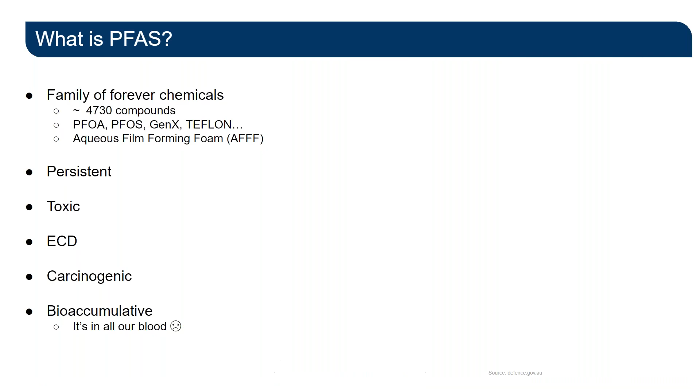Quickly on PFAS. For those who are not familiar with this compound, there are close to 5,000, or depending on who you ask, maybe even 6,000 of these compounds that have been in use since the 1950s. Folks have been using this for various applications, mostly for industrial application, but also in consumer products. For example, it's in the most popular ones I would imagine, something like Teflon. So everyone's got a pan at home that has Teflon coating, which makes it non-stick. This is a very popular polymer application of PFAS compounds.

But then there are many others that we don't even know exist. For example, dental floss is covered with PFAS as well. The use of this compound is almost endless. It's in everything that is either rainproof, non-stick, or non-scratch, any of those things, but also in other applications like firefighting, because this is resistant to heat and such.

Now, why are we talking about a compound that we have had since the 1950s or so? It's because as we learn more about these compounds, we are finding out that they could potentially be carcinogenic. These compounds were built to be a forever chemical, in other words, built to resist physical or chemical changes. So chemically, they're some of the strongest bonds that you'll find.

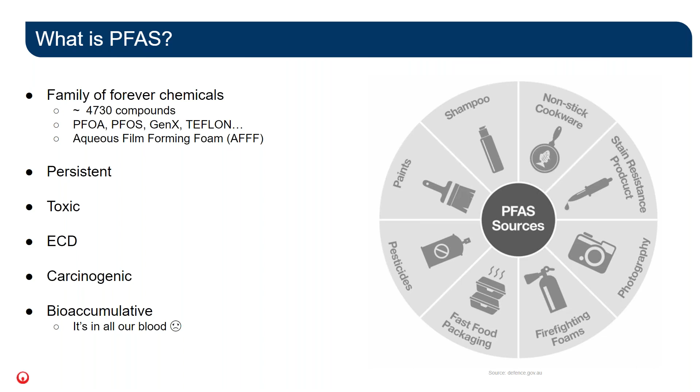There are some studies out there that say some of these compounds could have a half-life within your body up to 12 years. That's from when you stopped using it. So it's a pretty tricky compound.

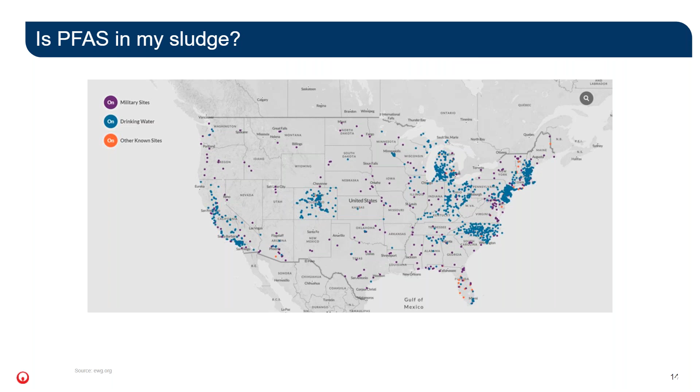That's what it means. In short, there is PFAS in almost every part of the world where we have industrialized, where we are using things like Teflon or even fast food. So it's everywhere. So it is in your sludge.

They tend to be hydrophilic, so they like the liquid part of the wastewater. The terminal compounds, which are fully formed, don't like liquid, so they're hydrophobic. They like to stick to things, so they end up in solids.

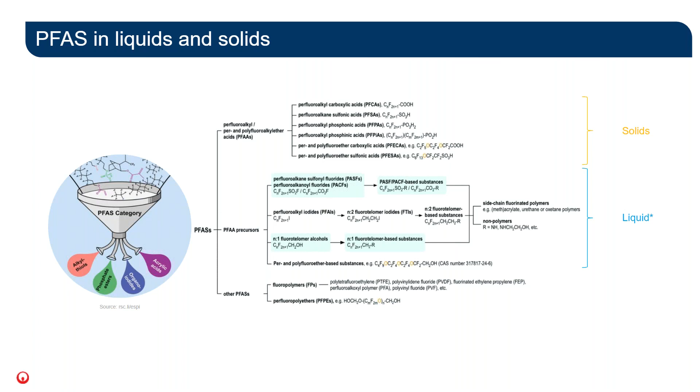Because we are going to be talking about PFAS in sludge, what we will be dealing with is mostly those terminal compounds. Now, what's the difference between each of them? It really only means that a terminal compound is far easier to identify or quantify in laboratories, because that's what the analytical capabilities are right now.

So if you have to figure out all of the precursors in the matrix of thousands of PFAS that's out there, you need to do what's called the total oxidizable precursor, or TOP assay, which basically oxidizes the precursors into terminal compounds and then quantifies them. But you can't really break them down into individual compounds like PFNA or PFOS, simply because that's not the nature of the TOP assay.

So in the next 5 years, GWI estimates that the utilities in the US alone, this is not Canada or Mexico or anything, it's just the US, they're going to spend $4 billion to address PFAS.

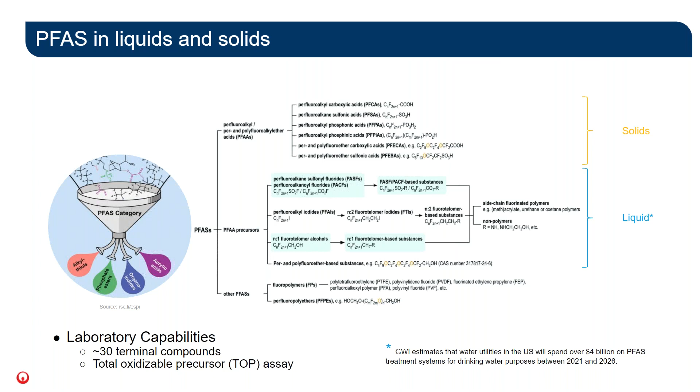In general, if you're concerned about this being in your drinking water, the best thing to do would be for you to just pick up the phone and call your local drinking water plant and ask them for the data. As a ratepayer, you should be able to get that information. And I surely did for my town here.

So that brings us to the next question: how do you destroy this PFAS? This is built to be indestructible. This is a forever chemical. You can cook on it, so obviously it's got some thermal resistance. So how do you break it down?

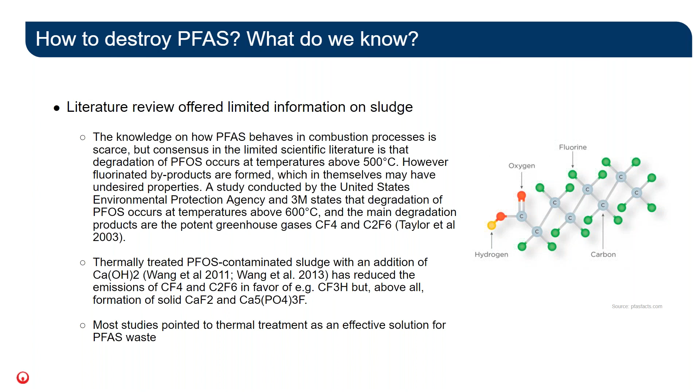We are not the first ones to ask this question, obviously, because you can see here there's a couple of papers from 2003 or earlier where others have attempted to do the exact same thing. In one study, EPA and 3M were taking pure PFAS, PFOS, and combusting it at some degrees, in this case 600 degrees or so, and they were basically seeing if there's any degradation, and if so, does it form any other gases and such.

There were other studies. We didn't cite all of them here, but there are other studies that looked at potentially pre-treating the waste with some known stabilizing chemical, lime or whatever the case might be, to see if they can further reduce greenhouse gas and such.

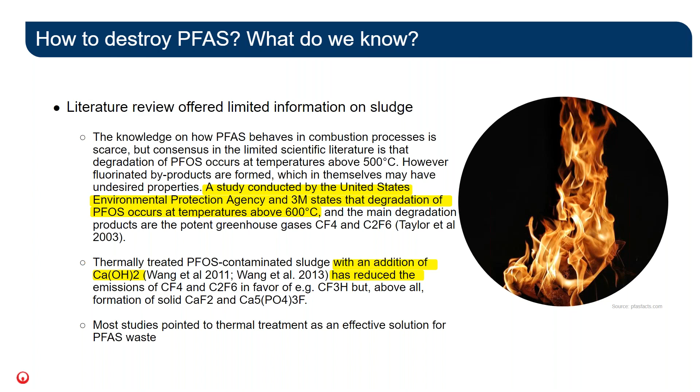So we took these studies as a basis for our work, because rather than just starting from scratch and shooting in the dark, we thought we'll just look at what others have done, see what we can take from that, and improve on those studies and apply that to the wastewater industry where we're dealing with sludge, which tends to be a little more complex because we are not burning pure PFAS compounds. It's in a sludge matrix, so there are other things you need to deal with, just more than having to worry about the PFAS destruction itself.

So with that, we looked at the thermal processes as an option. We also did look at chemical treatment, but that's something we are not pursuing at this time. We do have some options for chemically treating, oxidizing sludge, but we just don't think it's going to be a feasible solution for a marketplace, which usually tends to select technologies that are affordable.

We are going to focus mostly on thermal reduction, but I have included indirect thermal drying in our study because we wanted to have drying as the first step before we do some thermal reduction, since we have found that incineration of just wet cake is not necessarily the best way to go about it.

So with that being said, under the thermal reduction category, we looked at incineration. We also looked at supercritical water oxidation, and we looked at a couple of emerging technologies, or stuff that's out in the marketplace that are entering the thermal reduction marketplace, like gasification and pyrolysis.

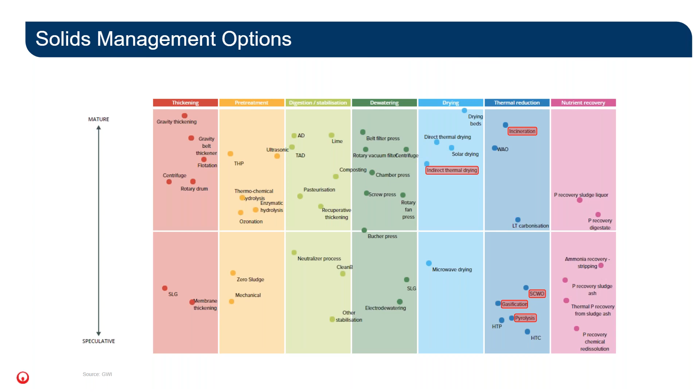We happen to get lucky because we are pretty close to Duke University in the Triangle. They have a supercritical water oxidation plant, a small plant, 1 MGD plant at the university, which they could take sludge and run experiments and such. So that's just an option that we got lucky for, being geographically in a place where we had some access to it.

You'll also notice some of these technologies require pre-drying. So for example, for an incinerator and the supercritical water oxidation, they could just take dewatered cake, say 25% or so, and they're able to treat that. Whereas pyrolysis, gasification, as well as the Biocon ERS, you need to pre-dry the sludge so as to get rid of all the water. That's where it performs best.

And again, the challenge with having just dewatered cake in an incinerator is more than just the implication on PFAS destruction. It has to do with the volume of flue gas that you're going to generate, because it's going to have all this water and steam that gets carried out of the system, making the process complex, because we are going after some compounds that are basically at detection limit in most instances. So you don't want to compound the problem by having excess flue gas as well.

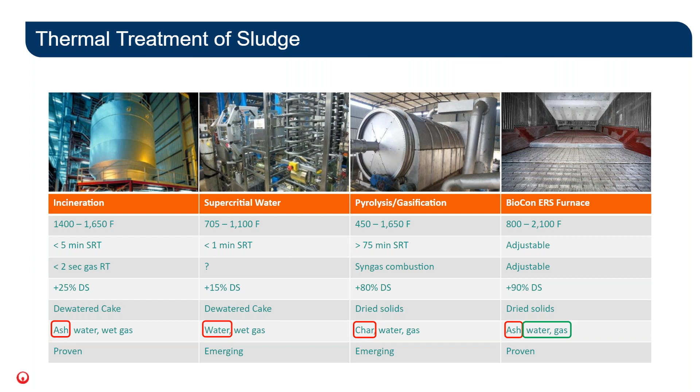Those are critical, because if it were up to me, I would leave the sludge with PFAS as is, rather than burning it and taking the PFAS and now putting it out in the emission. You're better off to not do anything if you're doing a shoddy job when dealing with an incinerator. That's our philosophy, so we really wanted to study in depth to see what the implications are.

Just to give a quick overview for those not familiar with the Biocon ERS: it's basically a dryer in combination with a furnace. So we take sludge, dry it with the dryer, and we get it up to Class A biosolids. Theoretically, you could stop there and people can use the biosolids as a biofertilizer. But in our case, we are going after PFAS, so we are going to combust it at high temperature in an ERS.

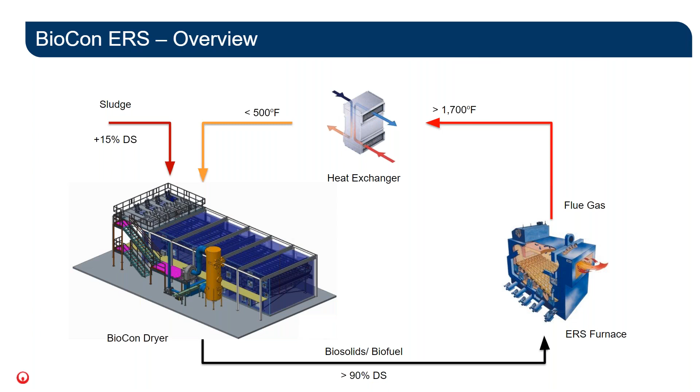The flue gas is then captured in a sequence of heat exchangers and an economizer and such, and you're reusing the heat coming off the flue gas to power the dryer. So once you have the system going, once you have both the dryer and the ERS functioning, you don't need any more fossil fuel to get the system to run.

It's self-sustaining energy-wise. It doesn't matter if it's digested sludge or undigested sludge or whatever the case is, because we are drying it up to more than 90% dry solids. The sludge autogenously combusts within the furnace, so there is no need for fossil fuel. So this is a very sustainable process.

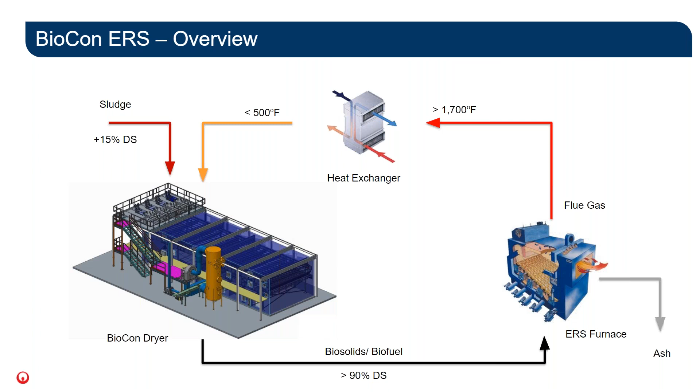And in the past, we just used it for energy recovery. That's where the name ERS comes from - it's Energy Recovery System. It's really not anything fancy, it's just an energy recovery system that we have now optimized for PFAS destruction. Again, just to quickly touch on what it is, it's a step-grate biomass furnace.

So it's not a new technology by any means. It's very common in colder climates, in countries like Canada, or if you go to Scandinavia, like Denmark, Finland, and Sweden. There they have so much wood chips and sawdust from the timber industry that they use as the primary fuel. Even though they have tons of natural gas and fossil fuel, they just take the leftovers from their timber industry and use that as fuel.

So you could actually go visit wastewater plants in Scandinavia, and they may even be producing steam using these types of furnaces. I've actually been to a thermal hydrolysis facility up in the middle of nowhere, Sweden, and they were using this exact system to take wood pellets, burn them, and produce steam for use in the thermal hydrolysis process. It's a pretty cool technology.

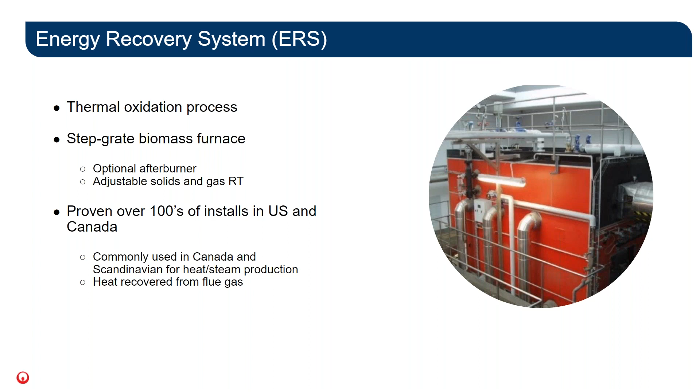Again, nothing new. It's just something that we like because it has features where we can adjust how long the solids and the gases need to be within the system. That gives you the flexibility to control and optimize the process for breaking down those complex PFAS compounds.

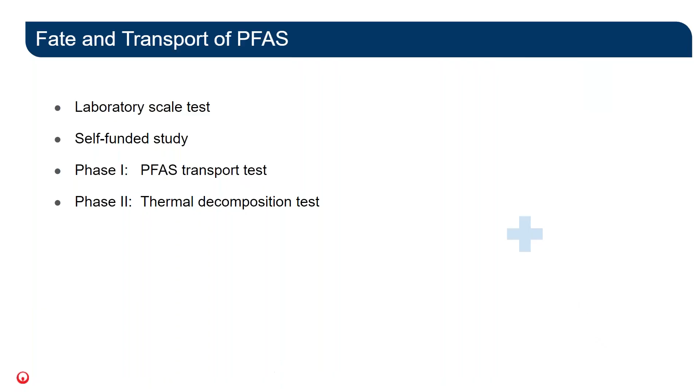The research, again, we focused on taking what we know and applying that on a laboratory scale. The reason we wanted to do it at laboratory scale is twofold. One, none of the full-scale plants wanted us to go and throw PFAS into their sludge, whether they had it or not - and they did - but they didn't want to do that because there's too much risk, since you're emitting directly to the atmosphere when it's all said and done, and they didn't want to take a chance contaminating the air currently being emitted.

And two, there was always this lingering question as to, if you did it in a full-scale study, what happens if PFAS does come out of the sludge, and what if it ends up sticking to the walls and ducts within the ERS or in the duct lines going into the air pollution control system? You may still not measure anything in your emission, but that does not mean you have successfully destroyed PFAS. You just converted it into something else that's now stuck to the walls, and maybe 10 years from now it'll break through, and next thing you know you are contaminating the air around the facility.

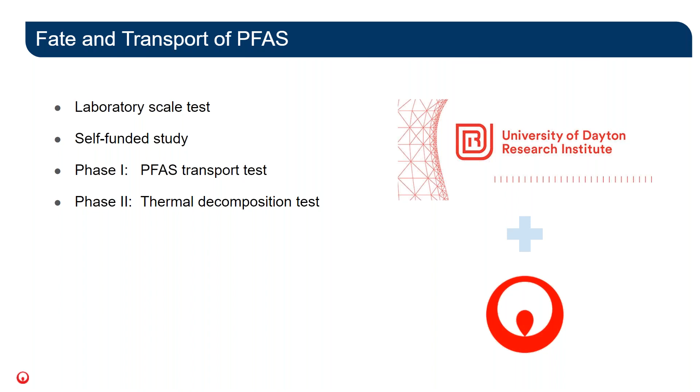So we decided we wanted to do this in a controlled environment such that we can actually clean or wash the insides of the reactor, so that we can capture anything that could potentially stick to the wall. We did the study in a couple of phases, and we self-funded it because our intention was to commercialize this solution.

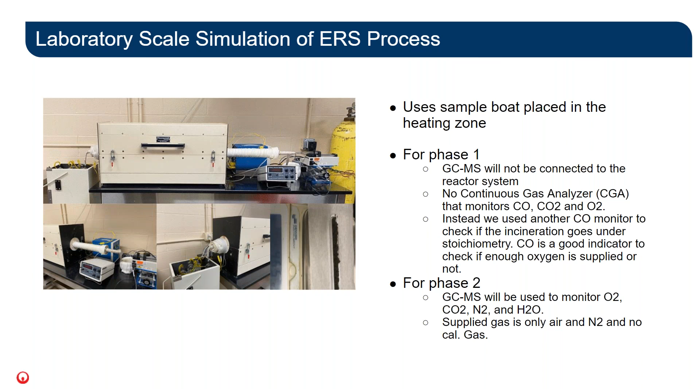Here's a quick setup. It looks kind of boring because it just looks like a big box with something sticking to it, but if you look at the schematic, there's a quartz furnace that we can control the temperature of. And we have the option to add excess air, nitrogen, or any other type of fluid to the system.

Then we could introduce the sludge either in a batch format or in a continuous format. We also had options to wash the system fully, so that even if any PFAS hits the wall and stays there, we can clean that out and capture everything in impingers. So we are able to do analysis on both the liquids and the solids.

This was a perfect setup for us, and we collaborated with the University of Dayton. They are contract researchers, and we hired them to do the work for us. One reason we chose that particular university is because all the past studies, the 2003 study and the 2013 study, pointed us to this research institute, since they were the same folks running studies for EPA as well as 3M. We thought these guys already know what they're doing, so they must have prior knowledge to help us with the setup, so that we're not reinventing the wheel.

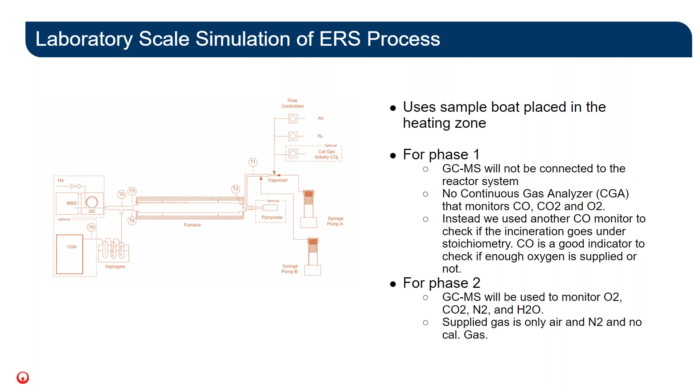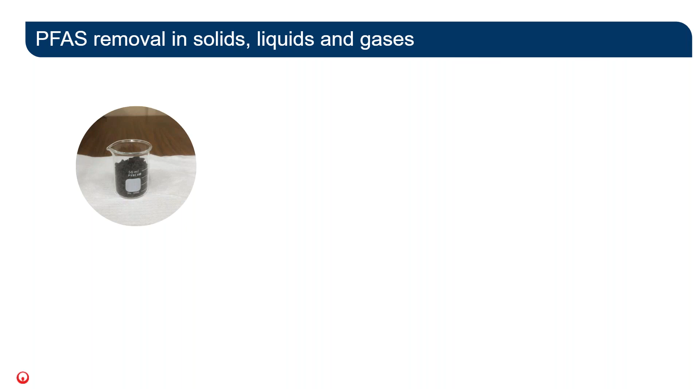Typically what we would do is take sludge, dry it up to 90 plus percent. We have our own methodology for doing that in our lab here in the Raleigh Triangle area, and then we send it to those folks. They then place it in a sample boat, like in the second picture, and insert it into the furnace.

In this case, we removed all the insulation just to take photos, but that's not how it is in the real world. On the other side, we also removed the insulation just to see if there's any soot formation. You know you're not getting treatment if that photo doesn't look clear through the quartz tube, and if you see black smoke or anything else, it's not working.

What we noticed was if we have low oxygen, like in a pyrolytic condition or a gasification type of level, we were having soot formation and other issues, which ended up with very low PFAS reduction. So in a way, we also learned that some technologies don't really work, or don't work as well.

The impinger that I'm showing here is one of those times when things didn't go well, and you can see it's fully covered in soot. That's because it's one of those failed scenarios where the oxygen concentration was not high enough. The final photo is basically of the inert material.

If you burn dry sludge like what we have, dried sludge at about 90%, you're going to end up with something like what you're seeing here. Although the volume looks similar, in terms of mass reduction, that's about 60% reduced mass. So typically about 40 to 50% of your dry sludge is inert material.

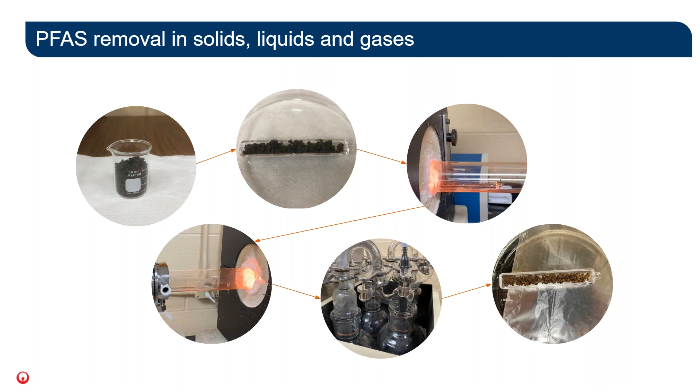We had quite a few challenges. I don't want to spend too much time here, in the interest of time I'll keep moving forward. But some of the challenges we had included just finding and identifying locations.

We knew the plants that had problems, but when we asked for sludge, even though we signed NDAs and such, they were pretty hesitant to participate because they were afraid that information would get out and people would know that they have issues.

But we did finally manage to get a couple of good locations and get sludge. We had to spike sometimes just to get a high enough concentration. We had other problems, which again, all of these challenges were overcome, but they're explained in our paper. We pre-published it in 2020, which is not a complete paper, but we're hoping to have it published in a journal sometime by the end of 2021. But again, multiple problems, but we managed to overcome almost all of them, with the exception of maybe the fluoride balance, which I'm not even sure is possible, and we may abandon that part of the study.

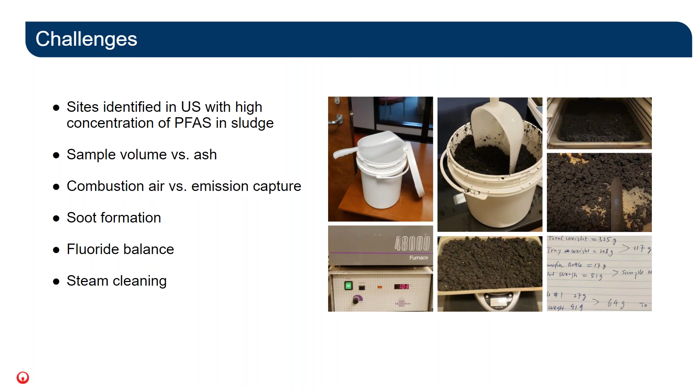Just a quick update on the progress. So in phase 1, we did about 5 or so transport efficiency studies, which gives you an idea of how accurate your data is going to be, if you're able to capture all of the PFAS that's going in, and if you do the mass balance, does it all come out, things of that nature. So we took our time to get that part figured out, and of course phase 2 is where the meat of the experiments are.

That's where we are studying low temperature combustion, high temperature combustion, and then various other conditions which mimic or simulate what happens in the ERS, and that way we get all of the efficiencies narrowed down. We're also continuing the study - it's still ongoing - to see if there are additional steps we could include to simulate air pollution control technologies like a scrubber or a mercury removal step, which we think is going to be necessary for this type of application.

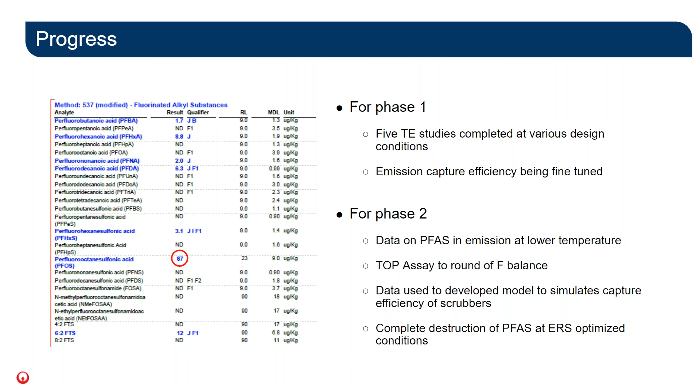With that, some quick early results. Here, we had to verify volatilization of PFAS, because there are studies out there that show you can volatilize PFAS under some temperature conditions. So because we use a pre-drying step, we wanted to make sure that none of those known compounds were coming out of the solid phase or the liquid phase into the gas phase.

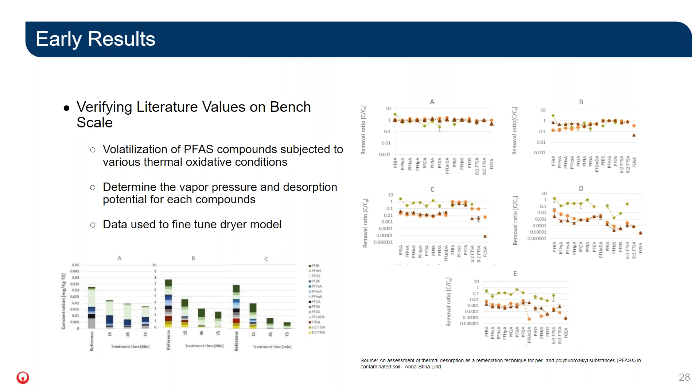So we had to do some of those verification studies, just to fine tune the dryer model. And then, of course, we did the calibration model - this is where all of the data that we ever got, we basically used. And of course, the first thing is we wanted to see at what temperature - the T99, or what they used to call in the old days, the incinerability index. It's a mouthful, so we just go with T99. Basically, that tells you at what temperature 99%, just a 2-log reduction or breakdown of the compound, is. But what we learned is some of the big compounds break easier, but they form smaller chain compounds, so we had to do multiple studies.

Our studies were mostly various conditions of temperature, oxygen concentration, chemical concentration - so the sludge with more PFAS or more of this particular compound, or less of them. And then we subject it to various conditions to basically get an idea of what happens in the time frame, within 4 or 5 minutes - that's basically what we're looking at, or 2 or 3 minutes, because it's a combination of what happens in the sludge phase as well as in the gas phase. We took an average and came up with this idea.

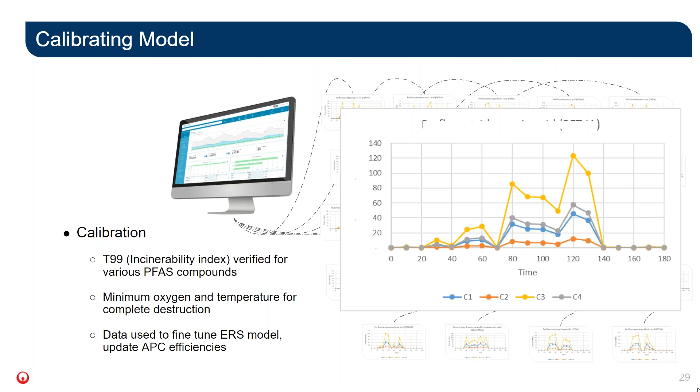So just to give a quick high level, the info on what we have since done is we have over 24 PFAS compounds that we have studied. Now, as analytical techniques improve, the labs probably are able to detect more terminal compounds. Right now, they can only do 24 - we use 24, but I heard just a week or so ago that they added 2 or 3 more compounds.

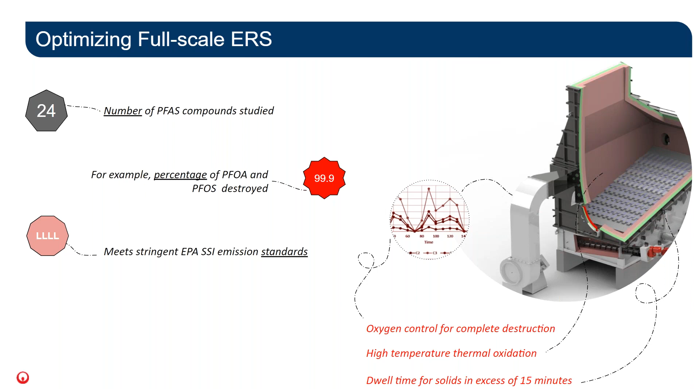So maybe that's something we may have to repeat. But if the compound is close enough and we know its properties, maybe we don't have to. Just to give an example, we had a couple of those compounds where we were easily able to get 99.9%, so 3 log reduction. But then there are some smaller or short-chain compounds which are much harder to get to. Our goal was to do all this and still meet the SSI standards required for combustion technologies. So with that, this is just a summary slide.

In our current model, we are able to optimize our ERS, so we can provide this as a fully industrialized solution, because this isn't the first time we'll be doing it, but it'll be catered towards PFAS. So we are able to do PFAS reduction and PFAS treatment using thermal oxidation based on the ERS model.

We also believe air pollution control is going to become key here, because these temperatures are much higher than what you typically see in conventional incinerators. But because we're dealing with PFAS reduction, we focus more on the ability to destroy PFAS as opposed to just being a low-cost solution. So air pollution control is still going to be a predominant cost in your solution.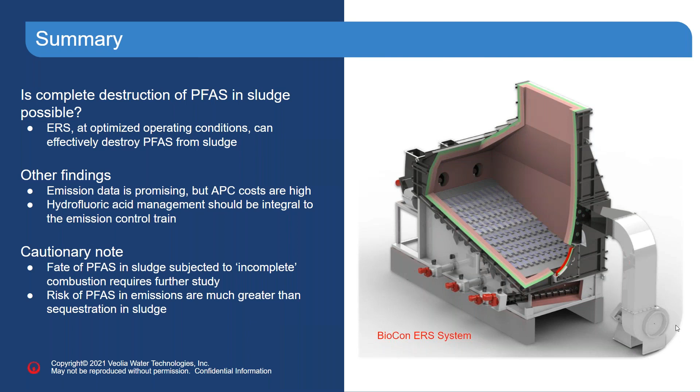Just a quick cautionary note from our study: what we noticed is that with incomplete combustion, the amount of PFAS you're able to destroy, especially in the gas phase, was very low, and that risk is much greater than just leaving the PFAS in the sludge. That's basically our conclusion.